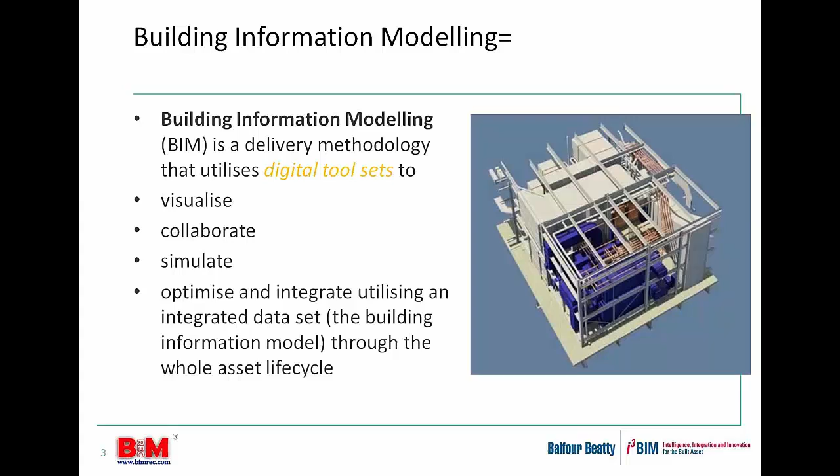In terms of defining building information modeling, let's call it a delivery methodology using a digital tool set to do so many things: visualize, collaborate, simulate, optimize, and integrate a data set where relevant.

And irrespective of height, if you're good at your job, you can lever the benefits. And with building information modelling, if you've got the right protocols, training, software and the tools in place, you can lever the benefits irrespective of project size.

We've seen benefits on a £100,000 office fit out as we have on a £500 million airport project. It's not just for the big complex projects, it can apply across the piece.

So in summary, the message overall is that building information modelling, applying these tool sets, can apply to any sector, from nuclear to health, from leisure to industrial, and it can apply to any part of the project life cycle, from work winning, tender period to operations and maintenance, any project size, and any discipline, whether you're the architect, the project manager, site manager, planner, or so forth.

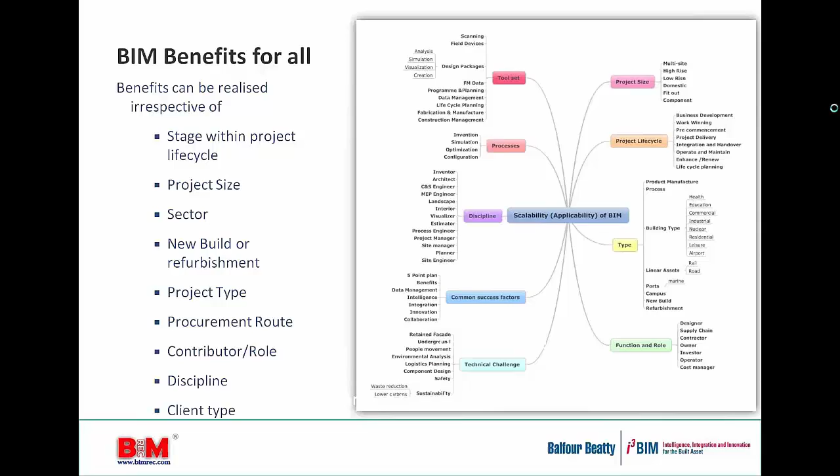As a business, we've identified 60 benefits of utilizing building information modeling, half of which are available for our clients, whether you define the client as owner-investor, user-occupier, or those that maintain the facility after completion.

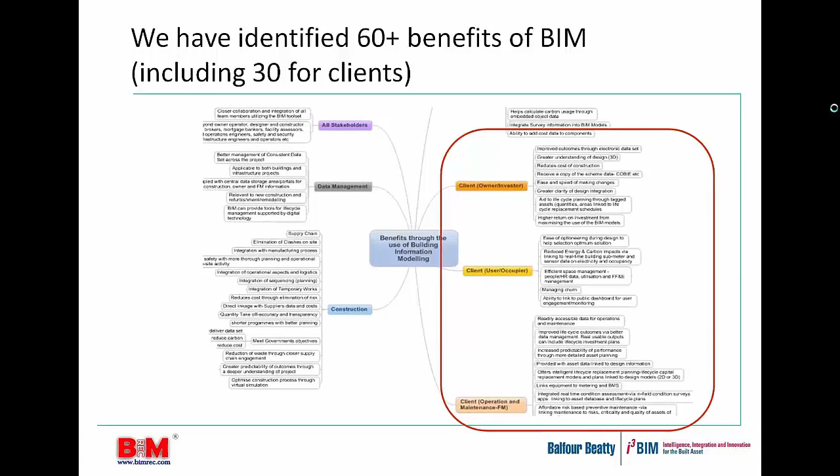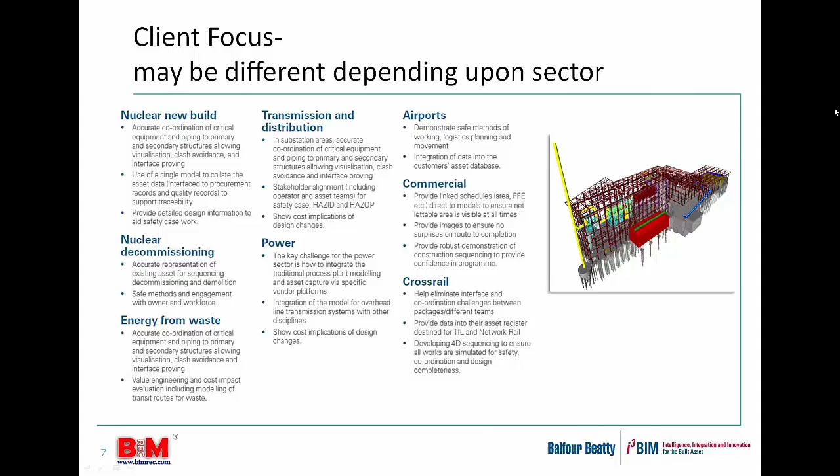A moment or two on clients and their interest. We currently have 72 live BIM projects, and we work for a number of clients. Whilst the tool set might be generically consistent, the application and focus from our clients can be very different, from nuclear decommissioning to Crossrail, to a commercial client, to those in the education sector or involved in hospital projects.

The tool sets can apply to every sector, but our experience is that clients focus on particular aspects of utilizing the tool sets to meet their particular business needs.

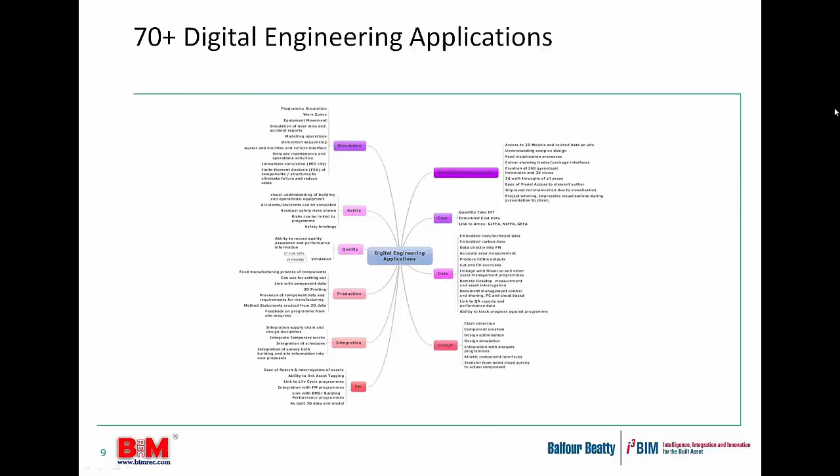We have listed 70 applications of the digital tool sets, all revolving around clarity of communication, embedding cost information or linking it with schedule of areas, data provision, commonly utilized tools such as clash detection in the design, BIM for safety showing residual risks in the models for all the team to see, and using the models to simulate sequences, operations, or design analysis. A vast array of tools offering a whole suite of benefits and advantages to the team.

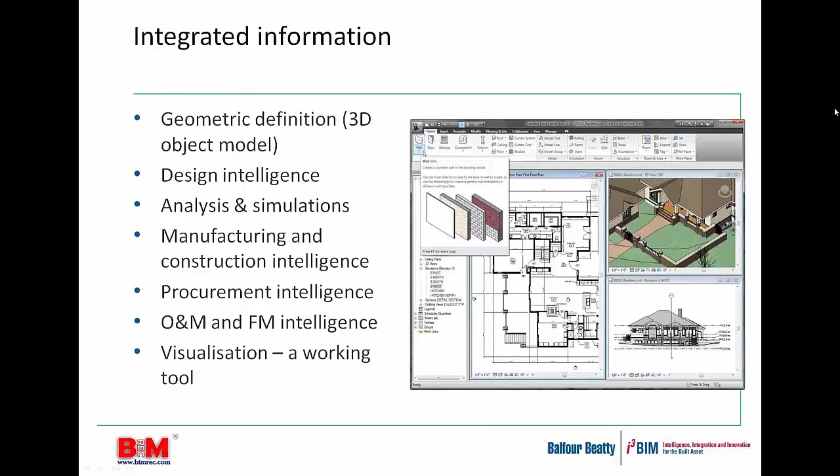Of course, utilizing the integrated information that comes from the creation of the model set provides the data, whether it's a wall, a window, a roof type, a services system, and so forth, giving you, as a popular phrase in the BIM world, a single source of truth.

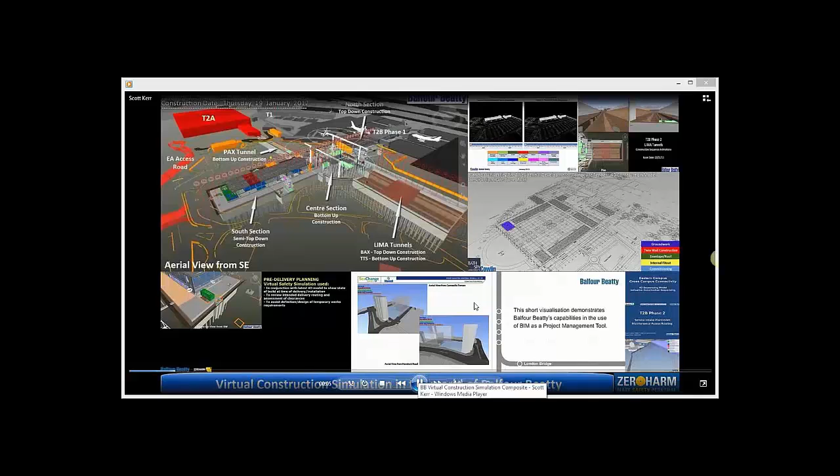Now at this point, I don't know if Barie can take the controls and show you an animation that demonstrates how BIM can be used to simulate a whole host of things. I certainly can. You're going to have to pass controls over to me quickly, Peter. There you go, Peter. Barie is playing. Okay. And I hope it's moving in the background, an array of images which should be moving.

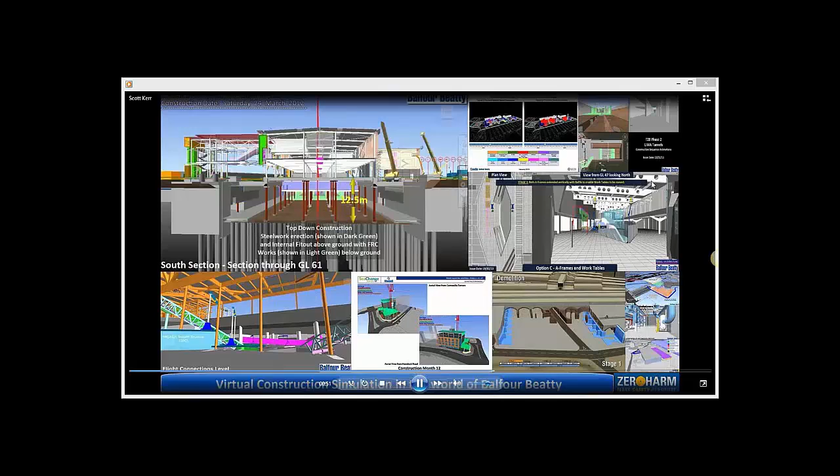They are. We've used simulation to highlight the pouring of concrete, the erection of steel frames. We've used it to simulate the installation of modular bits of kit through limited apertures, demolition sequences of railway arches and an old station, the construction of new office buildings or a hotel, or the movement of equipment. In the bottom right, a small animation shows how equipment and areas can be easily accessible for maintenance and operations.

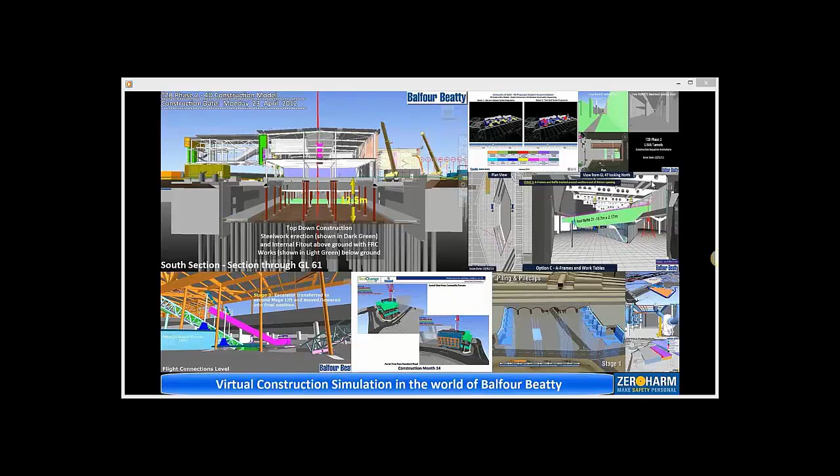So we've used simulating the integration of temporary works, what temporary works are needed to install an escalator in a difficult situation, to other aspects of construction and achieving digital sign-off. That's all I really wanted to say on that score.

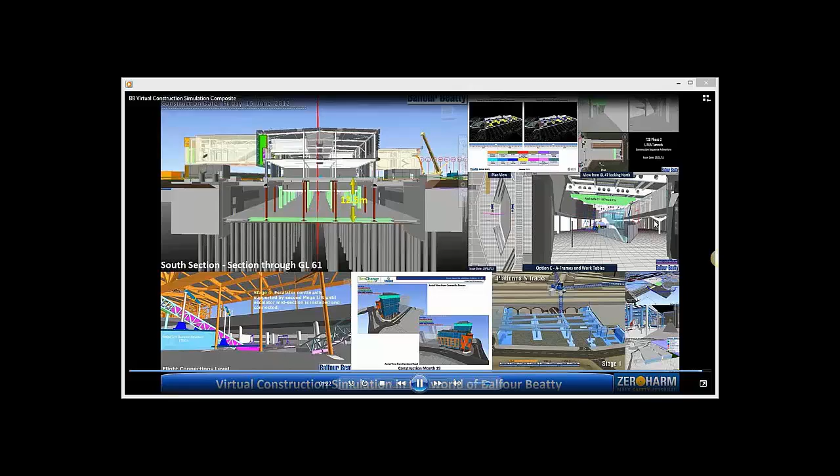I think everybody's familiar with the common term of 4D, utilizing that, but we're blessed with a set of tools that can simulate virtually anything. So, Barie, with that said, I can pass this back to you, Peter. Thanks everyone for your patience.

Right, okay, so imagine that you're a Formula One driver. Wouldn't that be nice? But whatever your role is as that driver, whether you're the project manager, the design manager, or so forth, you're supported by a highly trained and organised team, each of whom know the role they're playing on the project, the race, and they have the tools, the equipment, the training, and the motivation to make their contribution to a successful outcome. Imagine BIM in that sense, that each of you has access to a set of tools that you can use to deliver the benefits.

Briefly, I'd like to quote some statistics from some of our projects. Last year we did a survey, and we asked them: tell us how BIM is for you. Is it helping to achieve success?

Basically we find that the requests for information are fewer, and there are fewer clashes on site. Has BIM helped to reduce cost? A third of our team said yes, and when asked to quantify it, they could quote examples ranging from £8,000 to £10 million on a project. Could it help reduce the program? Almost a third said yes, between 2 and 10 weeks, and since then we've had a project that saved 3.5 months in time.

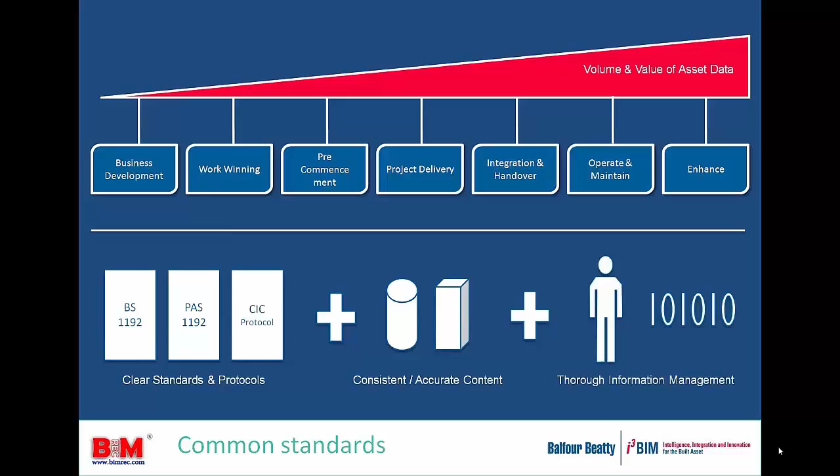But basically, we're seeing real tangible benefits across the piece of our BIM projects, and utilising the data gathered from early stage to completion and operation, armed with the right protocols, standards and training in place, optimises those benefits through the whole life of the asset.

So now we'll talk about some of the particular benefits relevant to the organisation types. Let's take the client. I'm not going to go through line by line every bullet point on these slides, but you can take them and read them and comment on them.

But what benefits do our clients see in summary? Where clients are engaged, they have a greater confidence in the team and the outturn quality. For those that are engaged, it's easier for them to go through their approval process, and it makes that approval process slicker. They utilize the data to aid their life cycle planning, and it helps reduce their facilities and management costs.

But from the client's point of view, looking at the action column, they need to understand what BIM is, and often we, like many of you, help your clients to understand what BIM is and how to lever the benefits, to get a building BIM execution plan in place with the goals.

And I find the two missing links for most of the clients that we have dealt with, who understand that they need to perhaps comply with a government requirement because they're public sector based, and they ought to specify the need for COBie level 2. We ask them to define their list of assets and the technical data that they need alongside each of those assets. That's a missing link for many of our clients, and that's where their biggest piece of work comes, in my experience.

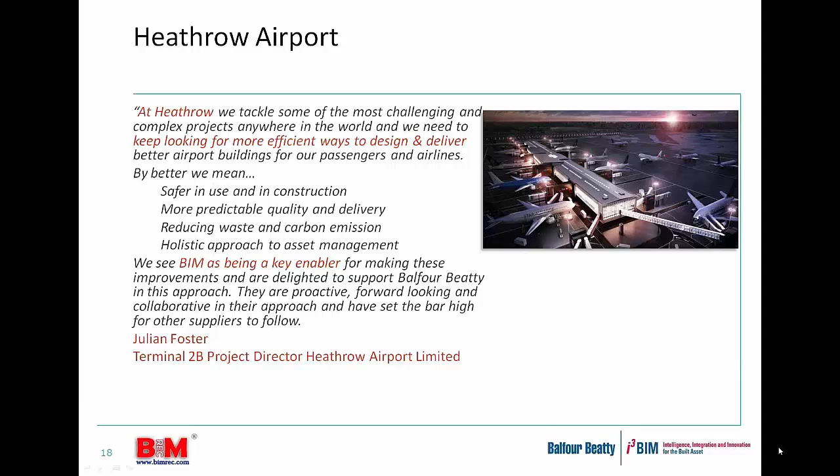Moving on, we have client testimonials saying that BIM helps us deliver a more efficient piece of design and delivery, and it's a key enabler for improvements across their business. It helps their heads of academies understand how a building will operate, helps them with curriculum planning. This is nothing to do with clash detection or sequencing, but it's helping the client meet their business needs.

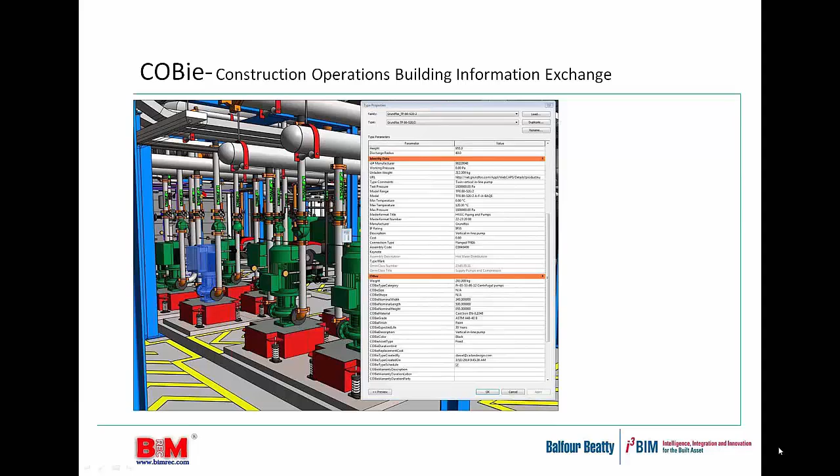And of course, we can provide the information to do with the assets. This shows you a typical plant room, one of the schemes we're delivering, highlighting the Grundfos pump with some of the data that the client needs. This particular client asked that we transfer the data directly into their current facilities management software package, so we can provide the data into a range of software packages, whether via COBie or some other means.

Going on now to look at a consultant as a generic type, a designer. For those designers that I've spoken to who have now worn the BIM t-shirt, shall I say, they all say that they can do their work with less staff. There's increased efficiency, and also the increased quality of integrating the schedule of accommodation and other schedules such as furniture, fittings and equipment schedules linked directly to this single source of truth.

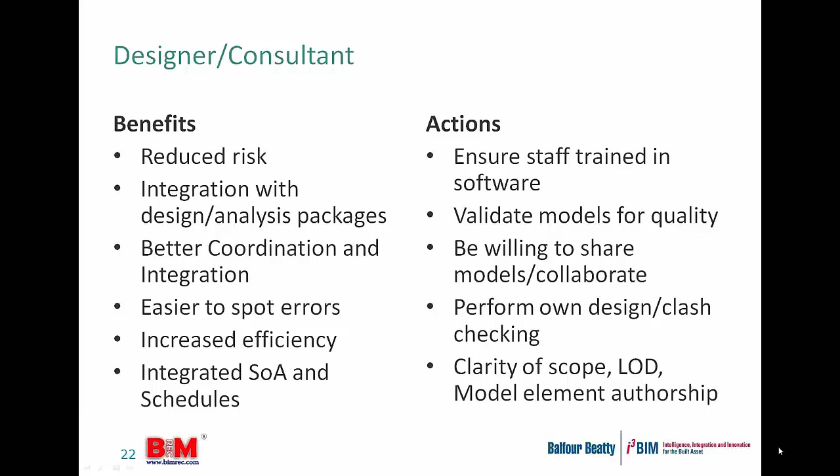It helps with the integration of other people's work, coordination. Obviously they need to be trained in the right software, and there's a cultural need for them to be willing to share the models and collaborate throughout the process, even when the design is in progress and not complete. But that helps everybody within their own BIM plan of work.

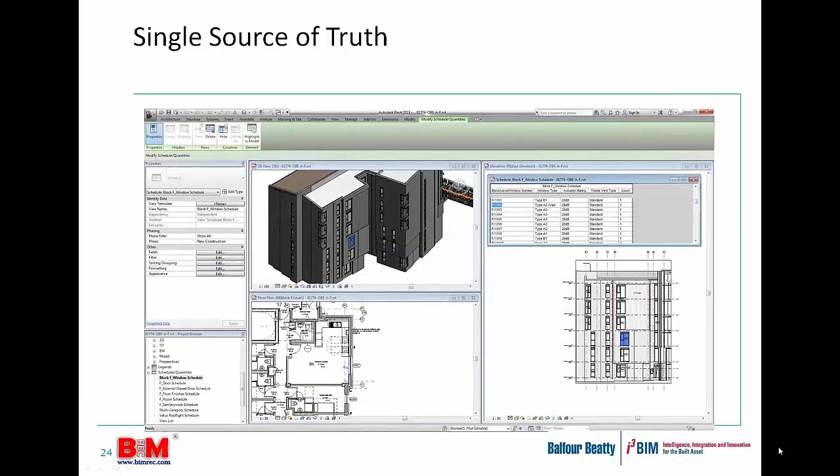So design reviews, if you change one window, it changes it in elevation, in section, in plan and so forth. Integrated schedules, clash detection, access through the BIM model to analysis packages, be they sun path, airflow, dynamics and so forth.

Moving on to the main contractor. How do we summarize what Balfour Beatty is getting out of it? Well, I've quoted reduce risk, better coordination and integration. We can highlight the scope packages for our subcontractors, do colour coding of the models. It helps us to make better informed decisions, which ultimately leads to quicker projects with fewer errors and reduced cost.

Of course, we need leadership in place to understand the benefits, to be able to provide the training and support, the investment necessary, but we have the protocols in place, internal expertise to help the group move forward, and we have communications in place to share the benefits and the learning.

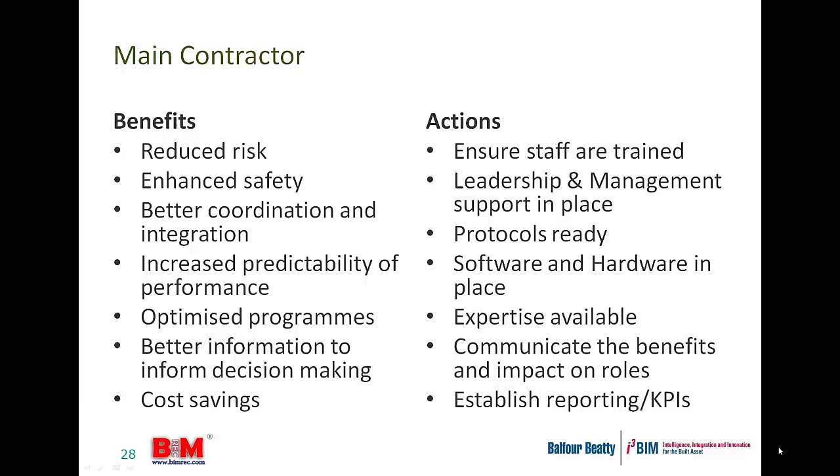One of our projects, Heathrow Airport, we use it to help with our construction methodologies, with our 6-week look-ahead meetings, design coordination, including subcontractors and supply chain. We use site devices to capture the data, so field operatives had something in their hand that had drawings and specs and so forth, as well as the key data that was required.

Moving on to manufacturers. For those I've spoken to, they get increased product awareness as their products are made available, whether through their website or some other portal, and the ability to integrate their components into the proposed design and construction. So it's not just a generic type, it becomes at the right stage a particular type.

Of course that assists the owner with as-builts and FM information. But in order to do that, they've got to be able to create their own products, make their library available, and the industry is now adopting the use of product data templates, which will provide a consistent set of data that will link through COBie and into the models.

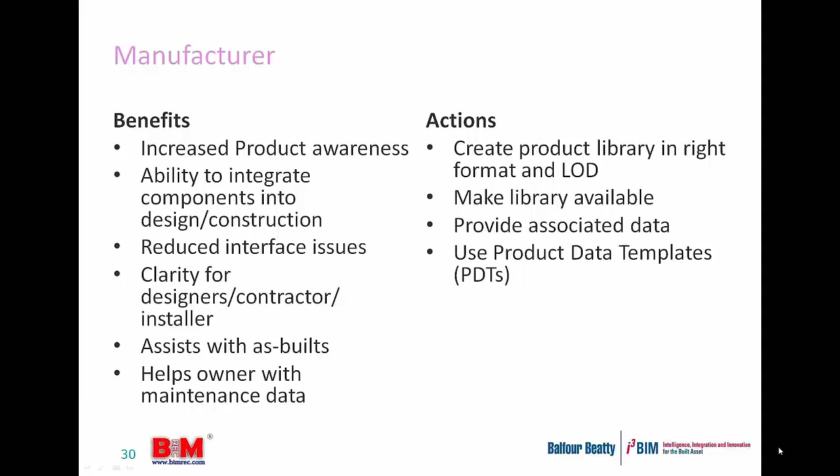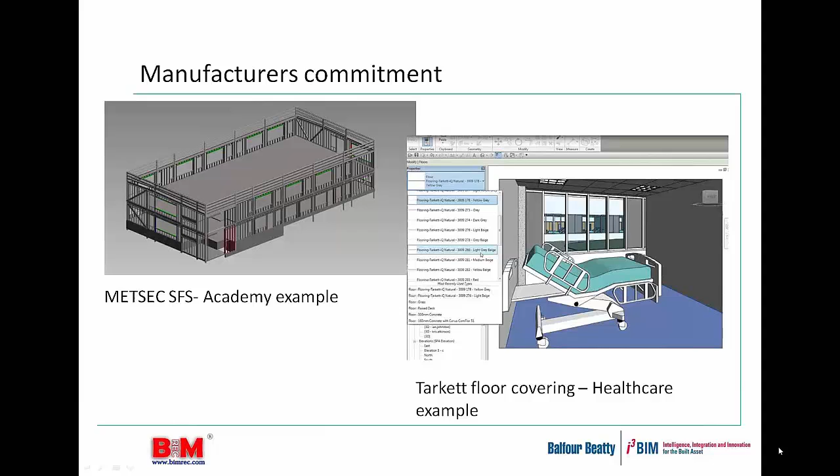So an increasing number of suppliers are entering into this space and providing an excellent array of information and data to go with their products. Just to quote one or two: Crane launched back in November 2013, and mid last year they reported thousands of downloads on an international basis, helping get their product across the marketplace by providing their digital equivalents available. Various manufacturers, Metsec or Tarkett, just to name a couple, providing BIM models and the data that goes alongside it.

So from the subcontractor side, those that have adopted it tell me it means they solve interface issues before they get to site, and it means fewer visits to site, less rework, which adds value and reduces cost. Of course, they've got to buy some software, train their staff, and be able to integrate the models with the designers and the rest of the team in their engagement process.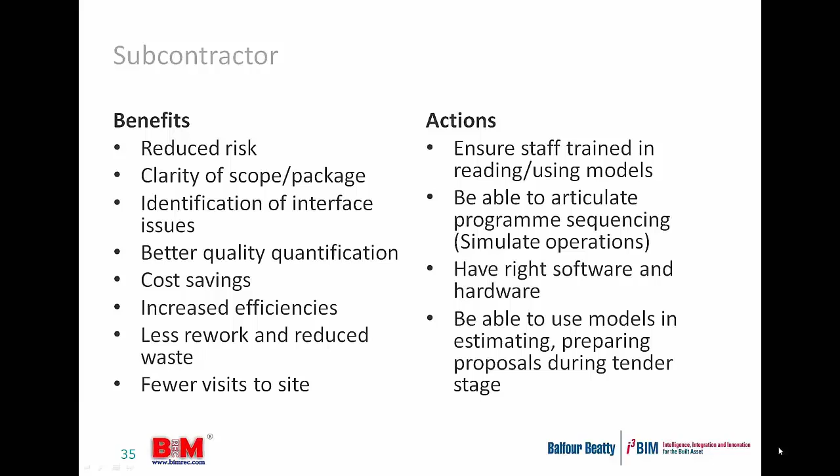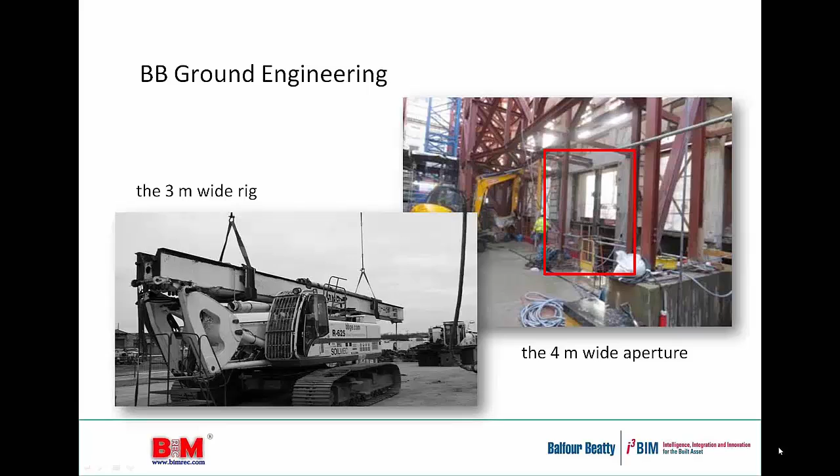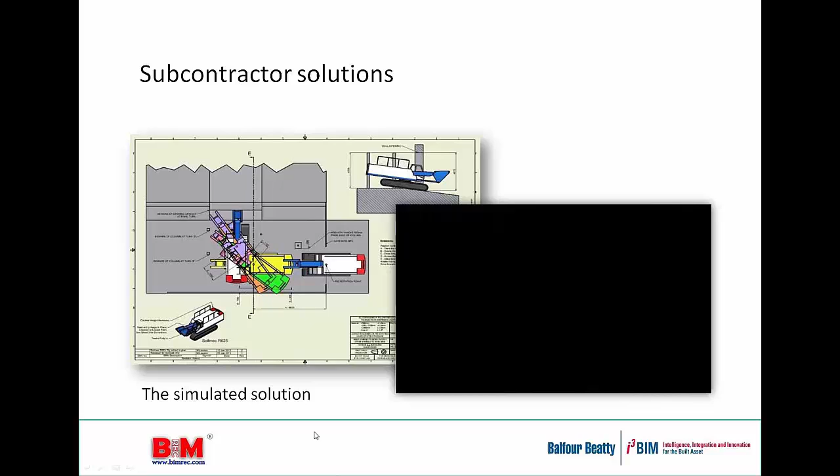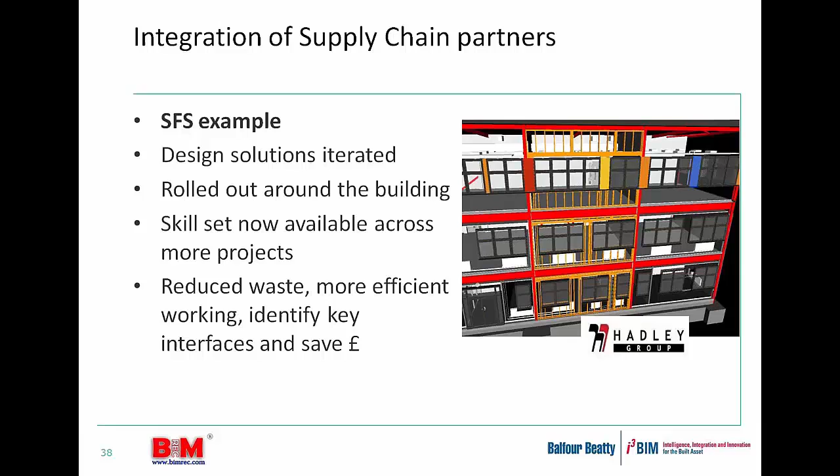And for FM operators, who I think are probably the least engaged, which is sad to say, in the world of BIM, we can reduce their staff costs during the soft landings and handover process because they get the data electronically and virtually instantaneously, saving the clipboard and surveying mentality used in the traditional process of assessing what assets they're going to be taking over.

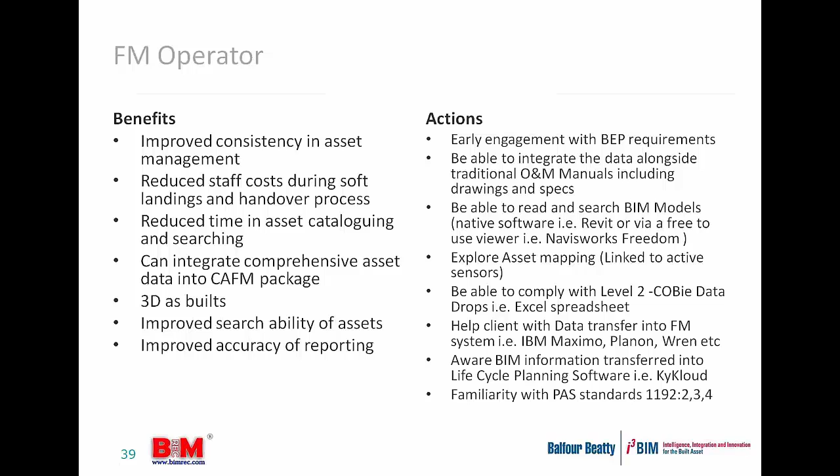It's reduced time in cataloguing the assets, and yes, it requires them to become familiar with BIM, to be able to read and search the BIM models, and to translate the information into their CAFM package, giving them access to 3D as-built to help them with life cycle and portfolio management.

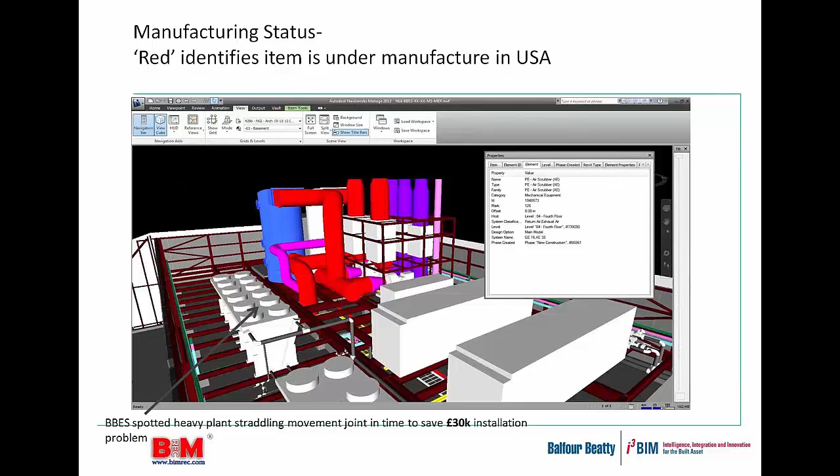The second issue is the team spotted some heavy plant straddling a movement joint that hadn't been picked up through the drawing review. They managed to move the plant electronically, virtually, and sort out the interfaces and connection problems. If they hadn't done that before getting to site, it would have cost them £30,000 in installation rework.

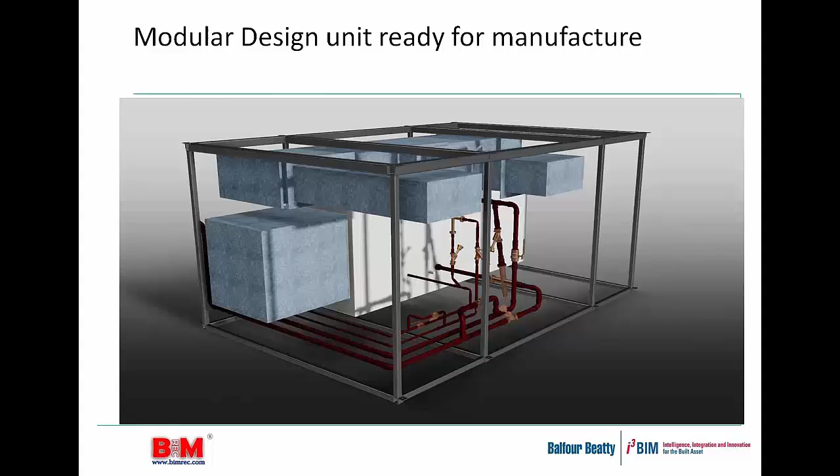The same scheme, this shows the designer's model of the plant room, the plant over the laboratory space. The designers then took that to the installers. The installers took that model, created their manufacturing model, the same kit, which was made in the factory and produced. So a great link, great story of that single source of truth using the same software, the same data.

Now just to quickly run through some consultant roles.

Most architects I've spoken to will never change from adopting BIM because of the increased efficiencies it gives them. They can do the same job with a higher confidence of production quality with fewer resources, either enabling reduced fee for competition or offering the client added value for the same fee. But of course they need to ensure the staff are trained, they understand the digital plan of work and the level of detail, and the scopes need to be defined.

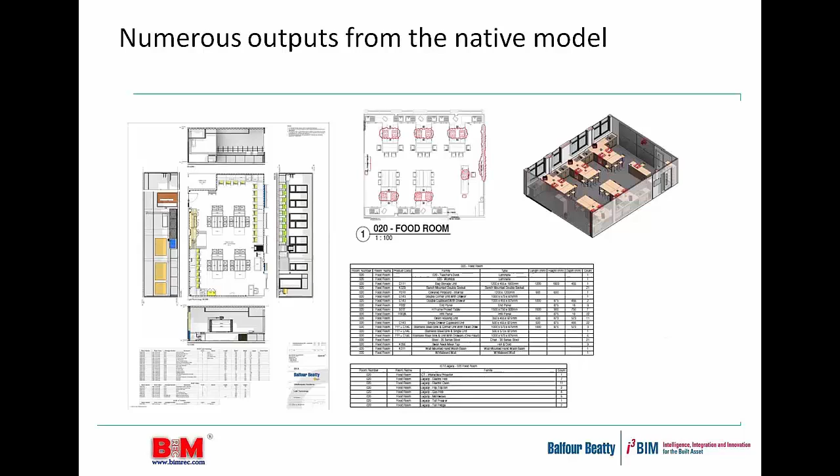But of course the beauty of producing the information is from that same output, so from the same native model you get numerous outputs, be they 3D, 2D, schedules, or data. For the MEP consultant...

There's the opportunity for them to integrate and coordinate their own plant equipment and create their own components. But of course, they have to be familiar with the software and hardware. And I think for many MEP consultants, that willingness to enter the 3D environment early - we can discuss and debate that perhaps later.

But we see a reluctance on some M&E consultants because they believe that their work might be wasted or ignored by the time an M&E installer comes along. But they can create their own components with the right data and integrate them within the rest of the model set.

Civil and structural engineers have been using the digital tool set for many years, so I think their ability to design in 3D and to link that software directly with the fabricator's work is well established.

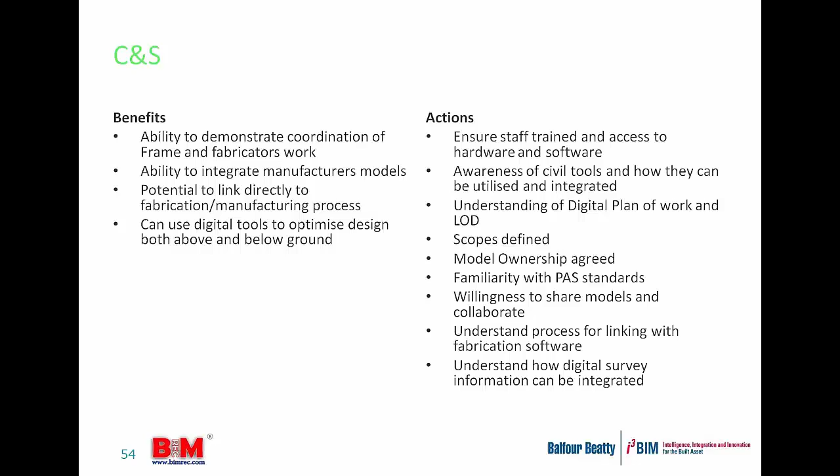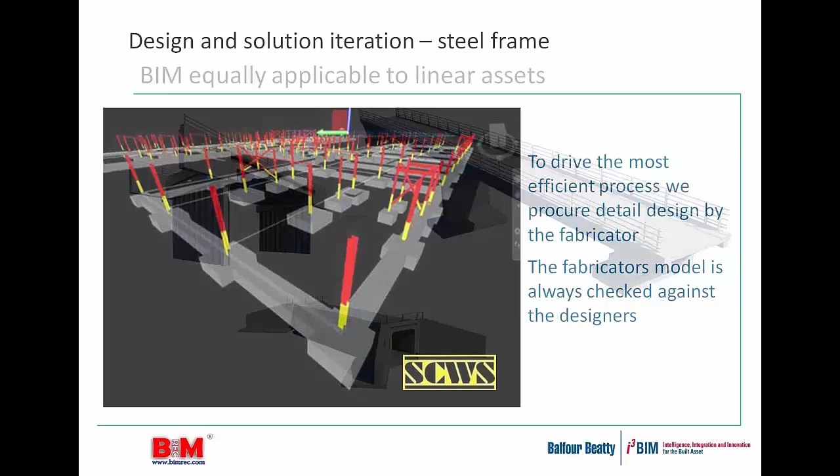But of course they have to get their scopes defined and agreed. They have to become familiar with the PAS standards and level of detail too. And we're using this through engineering, bridges, tunnels, roads, and so forth. Many fabricators designing in 3D, it's the way that they work, and we can superimpose their work on the consultant's model to check for quality.

Quantity surveyors - perhaps the last of the consultant breed to join the BIM party. But we all know, if we don't know, there are many packages available that can reduce significantly the time to measure quantities. The story of an M&E package that was given to a QS and given to a graduate, and they were both asked to provide the price.

They were both asked to provide the price. The sage old QS came back three weeks later with the price. The graduate used the BIM model, and he came back with a price an hour and a half later, and the prices were the same.

The digital tool set can take the tedium out of quantities. It doesn't produce a bill of quantities at the press of a button, but because of its ability to link with the schedules, to provide area, to provide data on steel or whatever it is, it can certainly reduce the time to allow the team to be better equipped to give cost information with more time to do something about it.

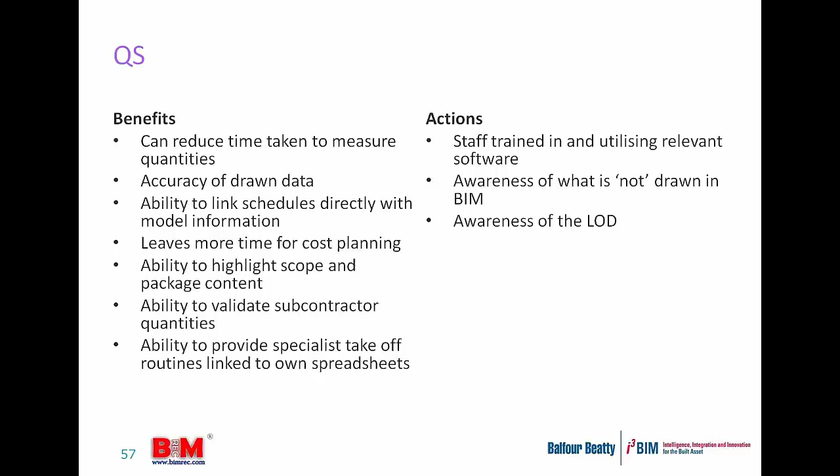Of course, the staff need to be trained, and the big thing for the QS profession is a cultural shift that's required because perhaps it's more radical in the adoption of new techniques. So you can use the software to give you the length of pipe, the number of valves, the weight of steel, and so forth.

And the remainder of the slide set, I'm not going to go through these in great detail, but in the pack are the benefits that each one of these disciplines can see for themselves on a project, but some of the actions.

So let's just take time to highlight just a couple. So from the project manager, and the reason I think that these are important is the fact that the greater the team are engaged in utilizing and exploring and understanding the tools and what they offer, the greater the benefits that accrue.

If a project manager doesn't really understand what BIM is all about, and thinks of it as something left to the design manager because it's a design thing done with the consultants in the corner, some kind of black box mystery, they won't lever the benefits of looking at how the tools can simulate construction processes, optimize the program, and give him and his team greater confidence in their delivery plans. So he should see that there's an execution plan in place, making sure there's the appropriate resources, internally or externally delivered, and the expertise to deliver the benefits that they're seeking.

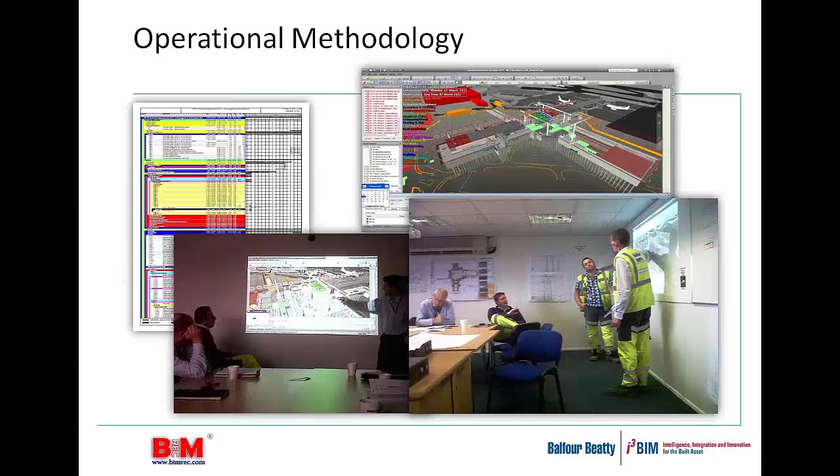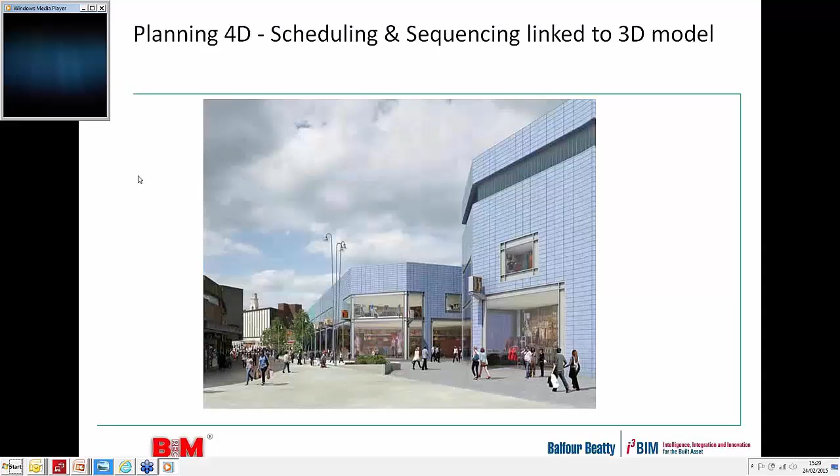So operational methodology is now built around the BIM models. Planners can use it to demonstrate the program, minimize risk, and look at alternatives, and I think you've all seen various iterations of a plan. Hopefully this will link - it's just a little slow today. Hopefully this is coming through, Barry.

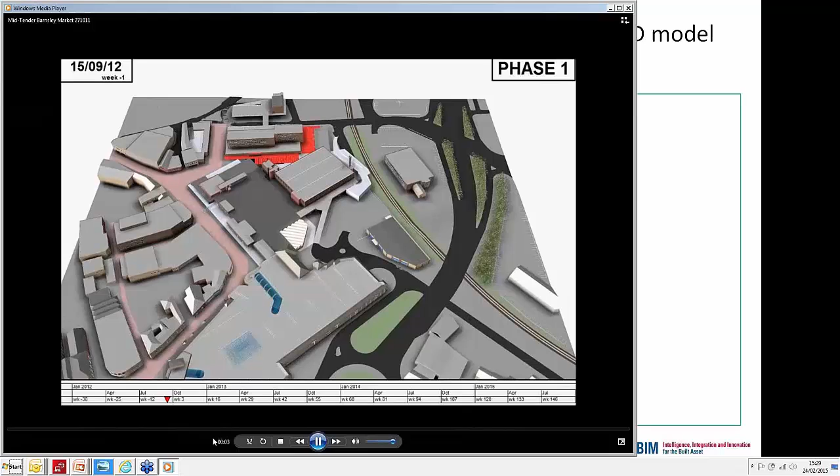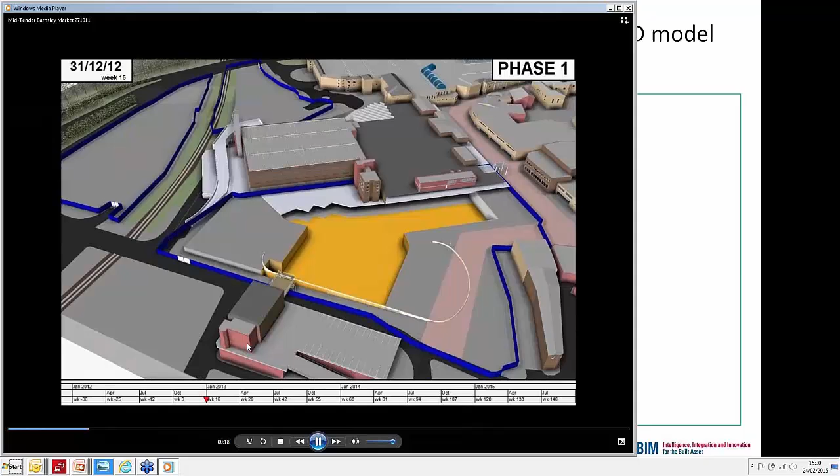The beauty of this is not so much as a construction tool, this particular illustration. This was used to illustrate a project to planning departments, highways departments, local retailers, and market traders, to understand the sequence of events that would take away an existing market hall and replace it with a shiny new one, and the impact on the locality and the environment. So these phasing tools, these simulation techniques, can have a multiplicity of purposes.

For the Commercial Manager, you can take the areas that are linked to the BIM models and the schedules, giving him time saving in data measurement and accuracy.

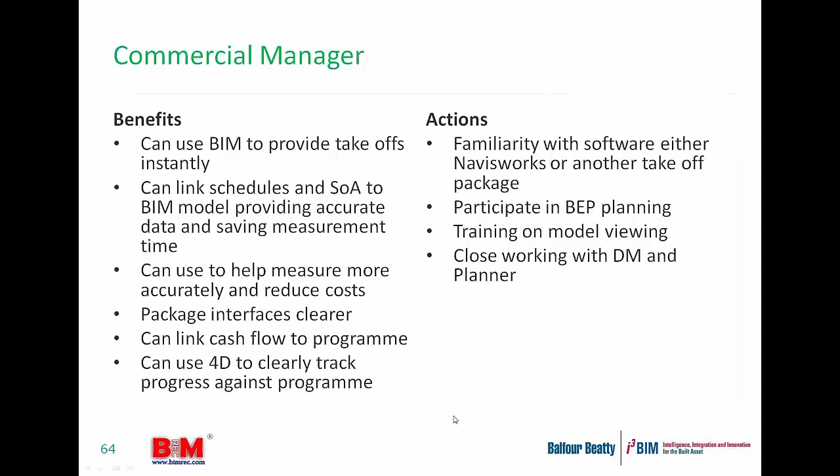For instance, we did an exercise recently where a subcontractor providing scaffolding came with a quote which was far higher than anticipated. We used the BIM model to check areas of measurement, and we provided a takeoff of X, shall we say, against the subcontractor's takeoff of X plus a bit. We illustrated where we'd done this on the areas we'd come back to, and this was accepted by the subcontractor, and it reduced the package by £50,000. Not bad for 2 days' modelling work.

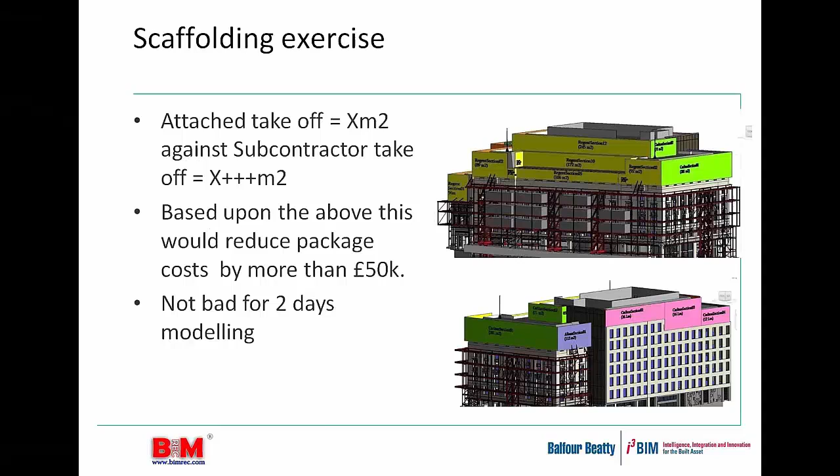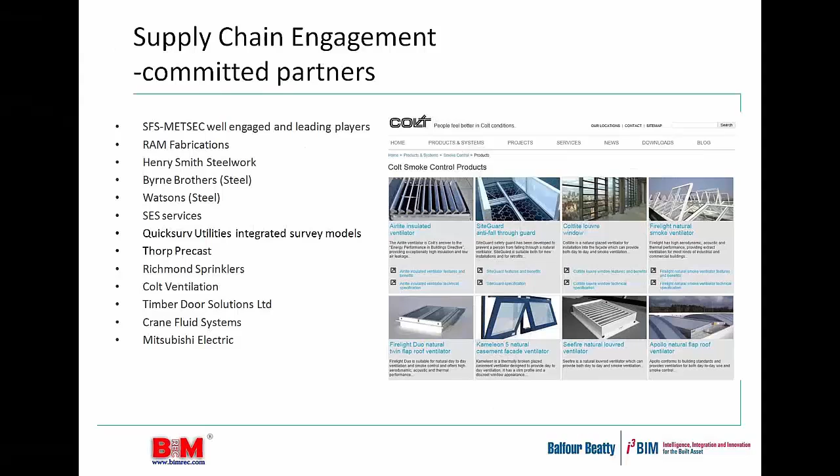So for the Procurement Manager, integrating with a supply chain can aid understanding of the scheme, and provide confidence that we can help meet the government standard mandate that all the data will be provided. The Procurement Manager has to be able to procure, understand what scopes to give out to the supply chain, so it doesn't artificially increase scope packages. If they don't produce BIM models, they at least need to provide the relevant data, which we can streamline into a slick process. So increasingly the number of supply chain members who are BIM literate and ready to go are helping us move forward.

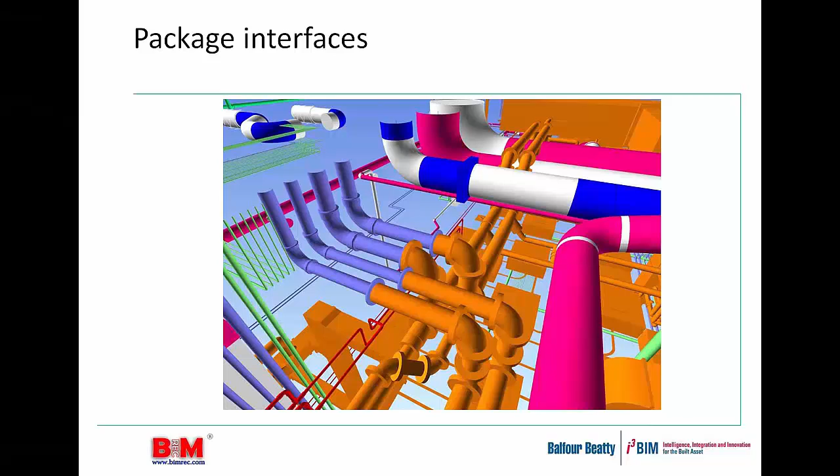And as I talked about before, you can utilize color coding to demonstrate package interfaces. From a design manager's perspective - some design managers become the information manager or BIM manager - but for them, working with the designers, it helps them spot issues earlier and have time to do something about it, helps the sign-off process, and enables more things to be done right first time. Yes, they need training, the right software and hardware, and they need to understand the models and protocols.

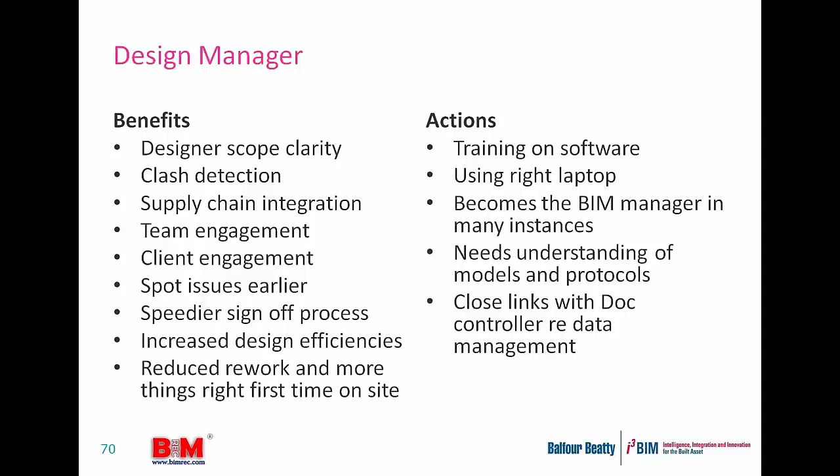So I think I'm coming towards an end. There's something that every document controller can benefit from. For quality managers, it's easier to get quality reports to aid sign-off. You can put your quality documents on a field device, get the teams to sign off. Some of our projects where we have site devices, those using them save at least half a day a week because they have everything they need in their hand.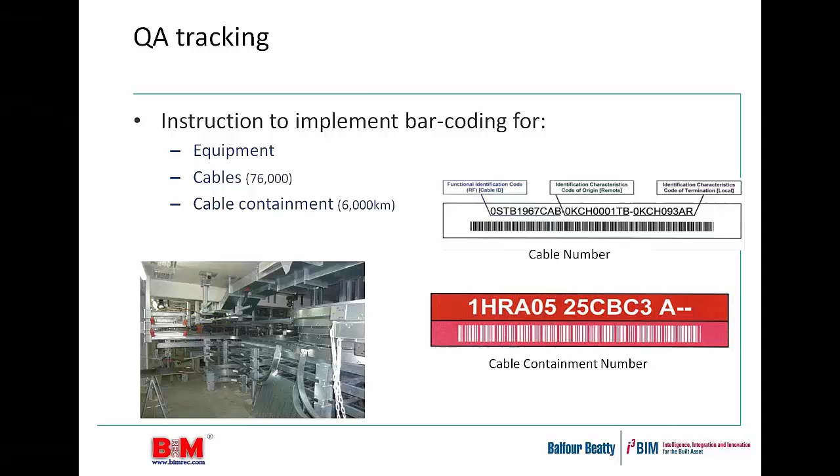Yes, they need training. Yes, there's a process to go through to integrate the site tools such as diaries or the snagging process, but it's worth the investment. It helps with logistics integration, tracking progress, workforce planning, as well as giving you access to all the documents and specs. For some of our projects, we even have to put barcodes on every cable, and that's the real forensic BIM. But it can be used as a quality tool to the nth degree, shall we say, on a nuclear scale if necessary.

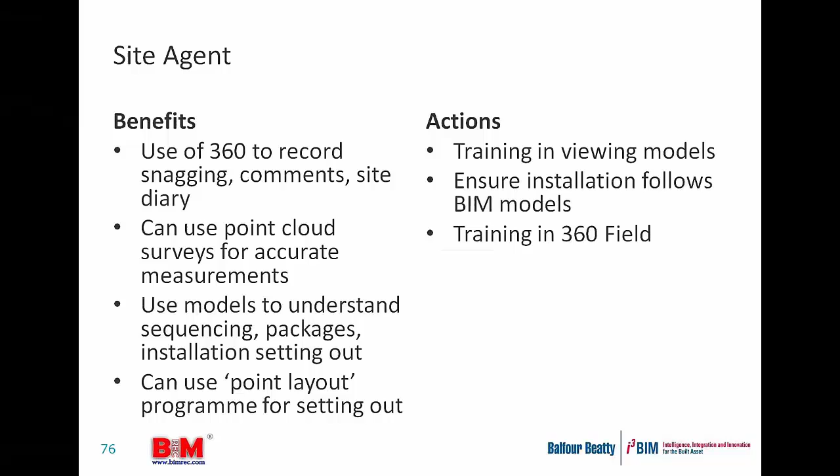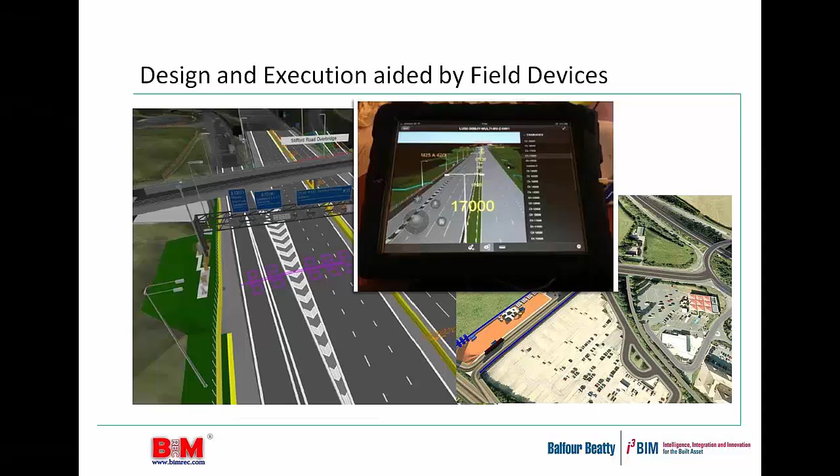So a site agent can utilize 360 Field, for instance, to record the snags, integrate and interface with supply chain. It can help utilize sequencing, packages, and installation setting out, provided he invests his time in understanding how to view models and how to use the tools available. So whether these are on buildings or roads or other sites, there are benefits for the relevant staff.

And for work winning, demonstrating that you can meet the government's mandate, demonstrate to clients that you can help them lever the 30 or so benefits, as well as the benefits that are brought to the project team themselves.

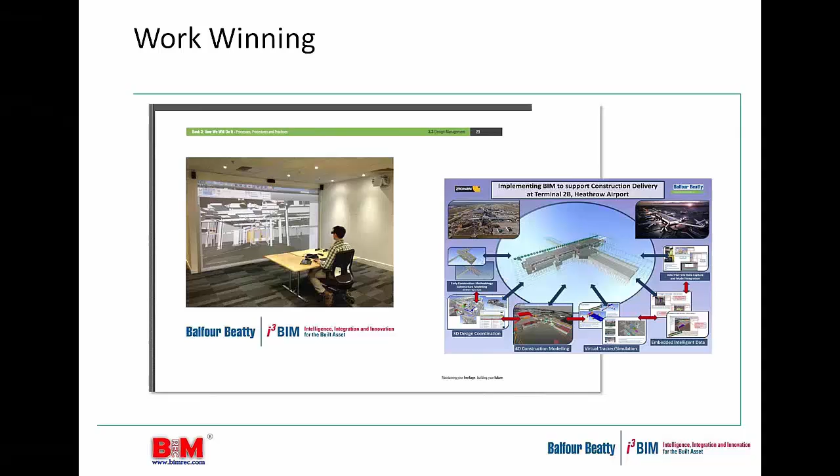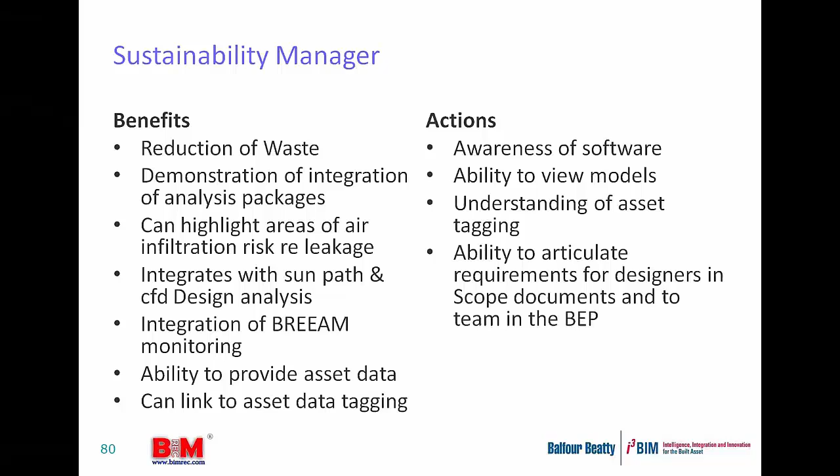Whether it's use of a full 3D immersive cave or utilizing the BIM models through a project screen on site for the 6-week look-ahead meetings, the more people that are engaged in this exercise using these tool sets, from the sustainability manager to the project manager, from the designer to the client, the greater you'll see the benefits to everyone on site, during design, from a client's point of view, a quality of delivery, the efficiency of a tender process, and the quality of information available to help with the running of a project.

We talked about the link between design to fabrication, constructability, and for the safety manager, simulate key risks. You can attach those risks to the program, whether they're risks associated with only 6 weeks work or whether they're residual risks for the whole program. All that can be made available, ultimately resulting in fewer risks and less likely of incidents.

Yes, they've got to learn how to view models and how to articulate their requirements. Here's an example of safety models linked to the program, linked with a hyperlink to a CDM register and other data.

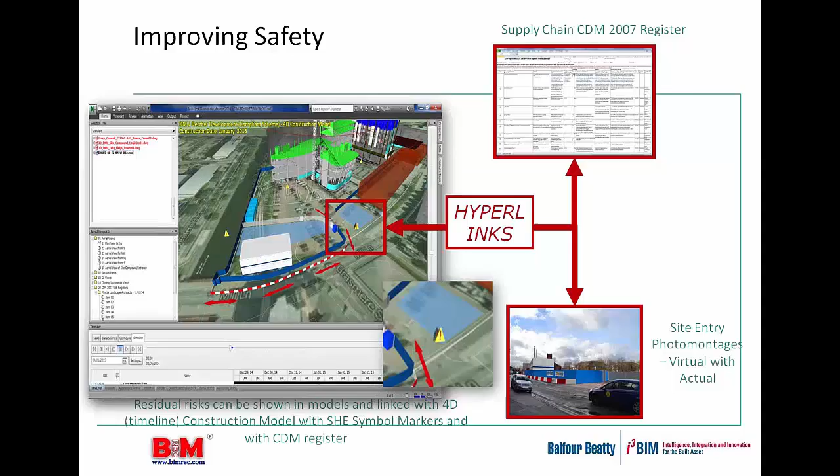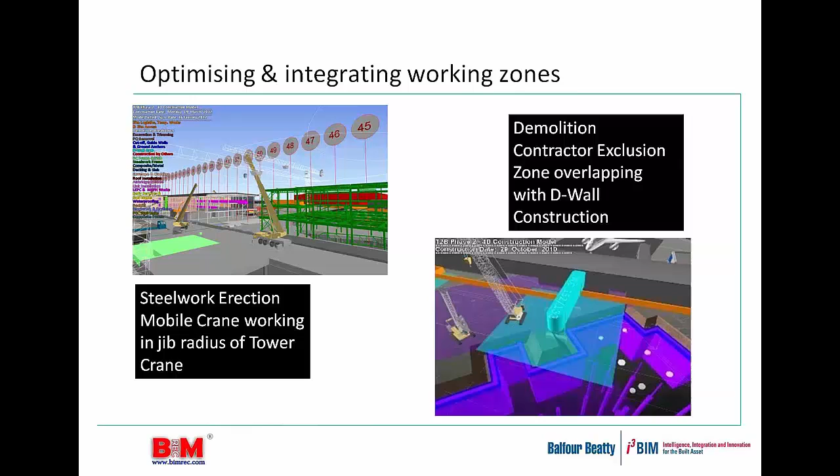And those work zones, safety simulations can be not only to do with the building, but also can be to do with work zones, whether they're crane and jib radii, or whether they're work zones for different contractors. And temporary works—if you can integrate your temporary works also in BIM, it's another risk that is mitigated and dealt with earlier.

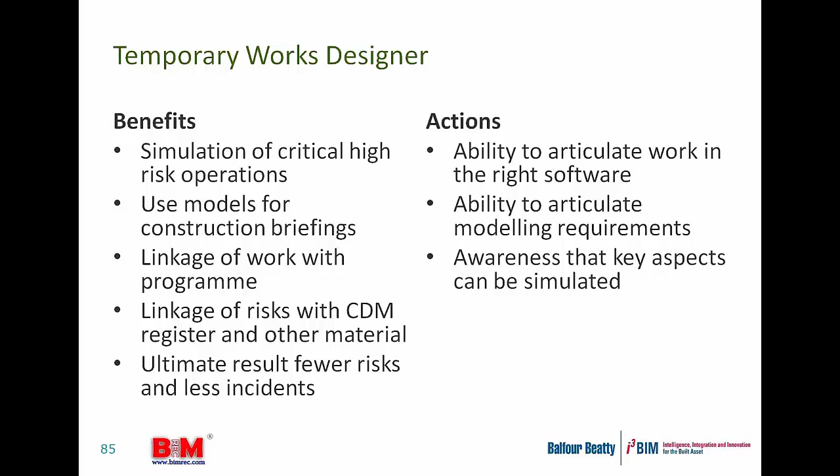So, final slide. I hope this has been useful. So, what is your vision? Look at this selfishly. What are the key problems and issues that you face on a project or in the design, construction, cost, planning, or other aspects? What tool sets are available to help you? What efficiencies do you think can be achieved?

And then set some goals and objectives to realize those. You might need training, you might need software, some hardware, you might need to change some processes. But all in all, and of course I'm biased, the investment is worth making that change and investment in both time and kit, because the return on investment is substantial. So are you willing to make that change, and what you have to do?